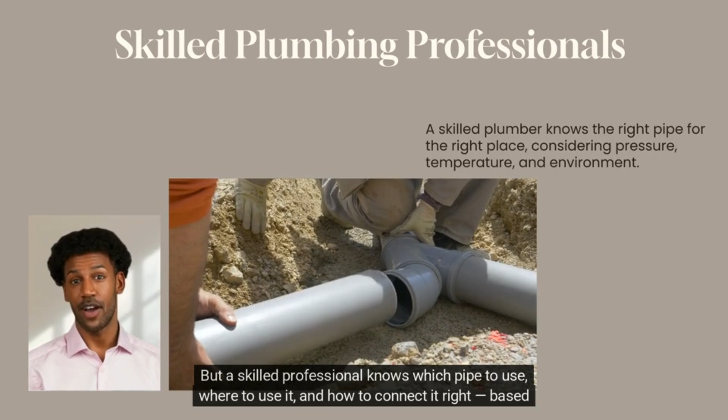Welcome to Module 4, Types of Pipes and Fittings. Now listen carefully, because this module is where your journey moves from general knowledge to real mastery of plumbing materials. You see, any plumber can install a pipe, but a skilled professional knows which pipe to use, where to use it, and how to connect it right based on pressure, temperature, environment, and function.

Water supply, drainage, gas lines, they all demand different materials, fittings, and joining methods. This module will train your eye to recognize pipe types, your mind to select wisely, and your hands to measure, cut, and join with precision. Because in this trade, the pipe you choose and the way you fit it could mean the difference between a solid system and a leaking nightmare.

Let's begin. By the end of this module, you'll no longer guess what pipe to use. You'll know it with confidence. You'll be able to identify the different types of pipes and fittings used in plumbing, PVC, GI, copper, PPR, and understand their specific applications. You'll learn how to measure, cut, and prepare each type of pipe for installation, and most importantly, how to join them using the correct method.

From solvent welding to heat fusion, from threading to soldering, you'll gain the hands-on understanding to make leak-free, professional-grade connections. This isn't about memorizing names. It's about mastering materials and knowing how to make the right choices on any site, under any condition. Because the mark of a true plumber isn't just in the tools they use, it's in the materials they understand and the systems they build to last.

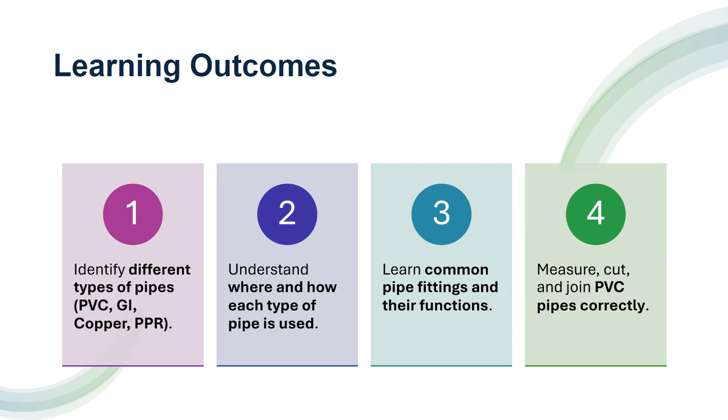Let me ask you a question. Have you ever turned on a tap and water flowed instantly? Or flushed a toilet and the waste disappeared without a second thought? That quiet system, hidden behind walls and under floors, is powered by pipes. In plumbing, pipes are lifelines. They move clean water to people and wastewater away from them. They protect health, preserve hygiene, and provide comfort, without being seen, without being celebrated.

Water supply. Every time a child drinks from a kitchen sink or a nurse washes hands in a hospital, it's a water supply pipe doing its job. Strong, reliable, leak-proof. Drainage and sewage. On the other side, drainage pipes carry used water from sinks, toilets, and showers out of buildings safely, so disease doesn't spread and environments stay clean.

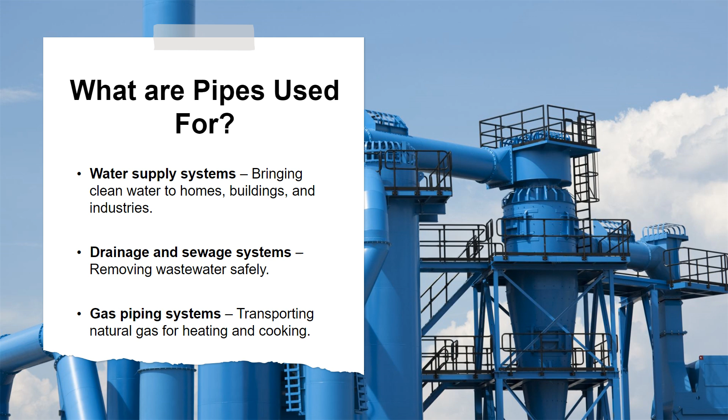Gas piping. And in homes that use gas for cooking or heating, pipes carry something even more sensitive: flammable gas. That means one wrong material, one faulty connection, and the risk is life-threatening. So you see, this isn't just about connecting tubes. This is about building trust into walls, safety into kitchens, dignity into homes. This is why you must know what pipes are used for, and choose the right type every time. Every pipe tells a story about where it should be, how it should perform, and what it can handle.

Let me introduce you to the 4 most common pipe materials in the trade, the ones you'll touch, cut, and install again and again. PVC, polyvinyl chloride, lightweight, affordable, easy to cut. PVC is your go-to pipe for cold water supply and drainage systems. But be warned, it can't handle heat. Use it for hot water, and it warps. It breaks, and your client calls you back, angry.

GI, galvanized iron. This pipe is old-school strong, coated to resist rust. It was once the king of plumbing. But today, it's being replaced. It's heavy, tough to thread, and rusts inside over time. Still, on the right job, under the right conditions, GI can be a warrior.

Copper. Elegant and durable, resistant to corrosion. Copper pipes are the gold standard, especially for hot water and clean drinking lines. But know this, copper is expensive, and it demands soldering skills. You don't install copper casually. You install it with care.

PPR. Polypropylene random copolymer. This modern green pipe is built for pressure. It's ideal for hot and cold water supply, especially in residential and commercial buildings. PPR requires heat fusion. You melt it to join it. When done right, the joint is as strong as the pipe itself.

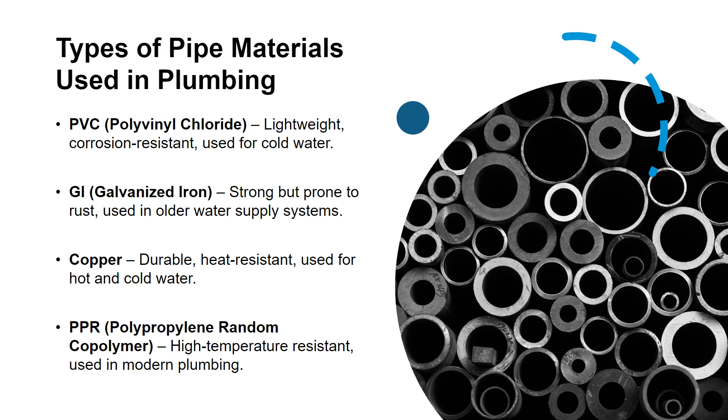Each of these pipes is a tool, and every tool must match its task. Use them wrong, and you fail the system. Use them right, and the system serves for years. So start learning the feel, the weight, the strength, the purpose. Because a true plumber knows, it's not just what you install, it's what you choose to install.

Let me introduce you to one of the most common pipes you'll ever handle, PVC, short for polyvinyl chloride. If you walk into a hardware store or a job site, this is the pipe you'll see in stacks, lightweight, white, and ready to serve. Why it's popular. PVC is a favorite because it's light to carry, easy to cut, resistant to rust and corrosion. That makes it perfect for cold water supply systems, drainage systems, and even underground lines.

Limitations. But don't let its simplicity fool you. PVC has limits. It can't handle heat. Install it in a hot water system and it will warp, bend, or burst. And because it's plastic, it's not as strong as GI or copper under physical stress.

So avoid using it where the pipe might be stepped on, hit, or exposed to harsh environments. How to work with it. PVC is joined using solvent cement, a chemical bonding method. It's quick, but you need to be precise. A rushed or uneven joint could leak later.

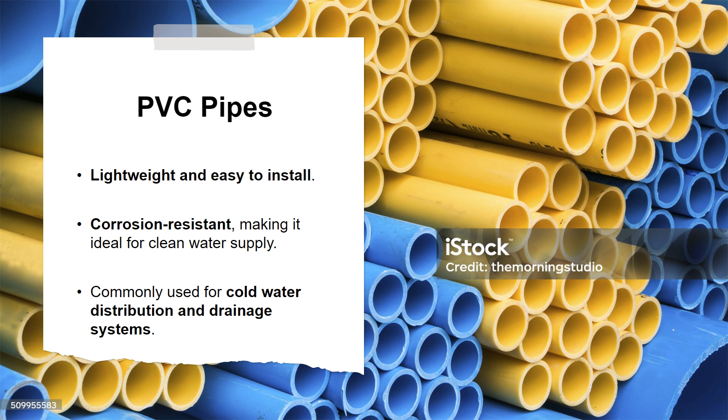Field tip from experience. I've seen young plumbers press fittings too hard, thinking tighter is better. But PVC fittings need smooth application, not force. It's about finesse, not strength. Mastering PVC is step 1 in your pipe journey. Respect it, handle it well, and it will serve, leak-free, silent, and strong, for years.

Let me introduce you to one of the most common pipes you'll ever handle, PVC, short for polyvinyl chloride. If you walk into a hardware store or a job site, this is the pipe you'll see in stacks, lightweight, white, and ready to serve. Why it's popular. PVC is a favorite because it's light to carry, easy to cut, resistant to rust and corrosion. That makes it perfect for cold water supply systems, drainage systems, and even underground lines.

Limitations. But don't let its simplicity fool you. PVC has limits. It can't handle heat. Install it in a hot water system and it will warp, bend, or burst. And because it's plastic, it's not as strong as GI or copper under physical stress. So avoid using it where the pipe might be stepped on, hit, or exposed to harsh environments.

How to work with it. PVC is joined using solvent cement, a chemical bonding method. It's quick, but you need to be precise. A rushed or uneven joint could leak later.

Field tip from experience. I've seen young plumbers press fittings too hard, thinking tighter is better. But PVC fittings need smooth application, not force. It's about finesse, not strength. Mastering PVC is step 1 in your pipe journey. Respect it, handle it well, and it will serve, leak-free, silent, and strong, for years.

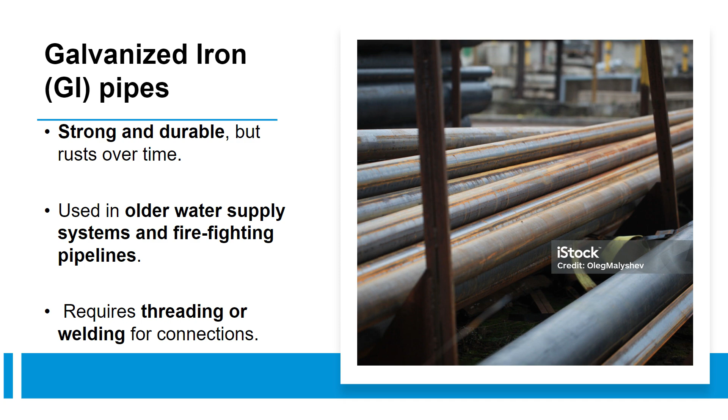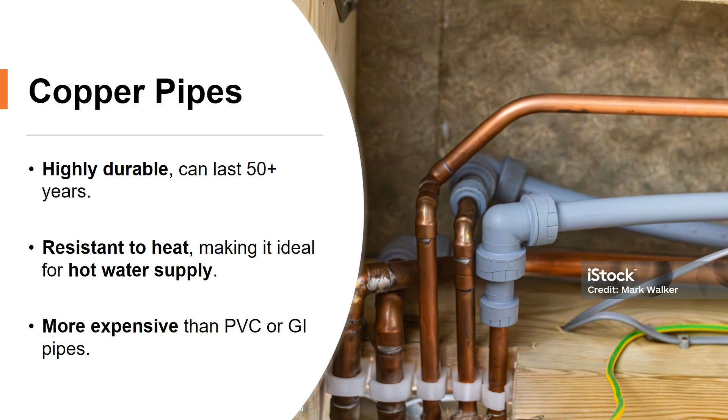Pro tip from the field. Always clean both the pipe and fitting with emery cloth before soldering. A dirty joint will fail, no matter how much heat you use. Copper isn't just about piping. It's about craftsmanship. If you can work with copper, you've earned respect. So learn it. Master the flame. Build with confidence. Because copper doesn't forgive shortcuts, but it rewards precision.

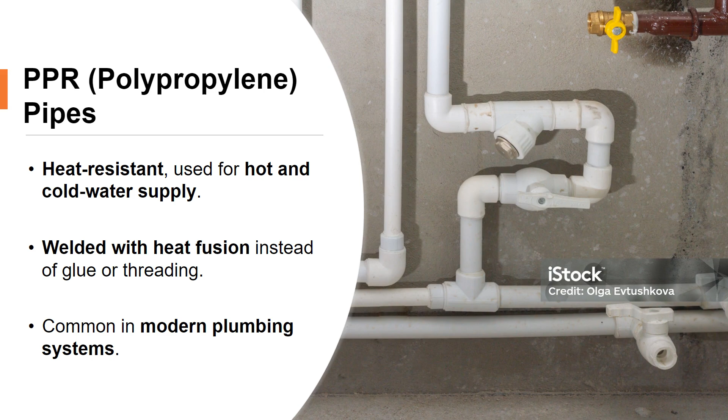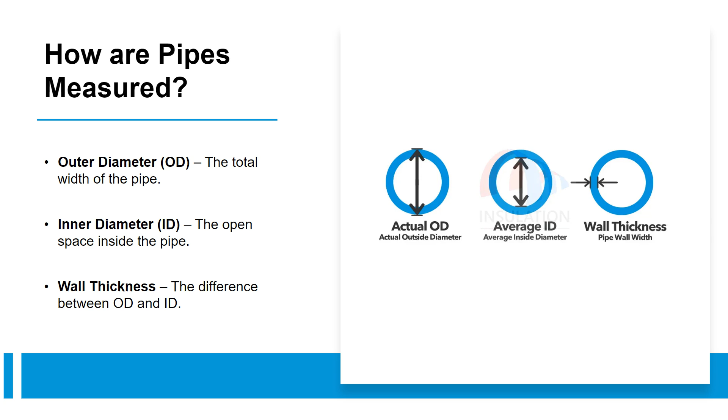Two pipes may look the same, but their internal diameter or wall thickness could be completely different. And trust me, mismatched measurements create bad joins, leaks, and frustrated clients. So don't measure with your eyes. Use your tools. Take your time. Because the plumber who knows how a pipe is measured is the plumber whose work fits. The first time. Every time.

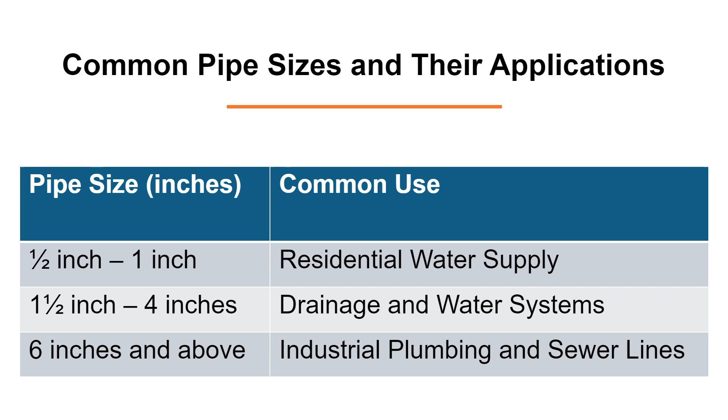The right size pipe does more than just fit. It ensures function, flow, and longevity. So don't guess. Learn the sizes, understand the purpose, and make the right choice. Every single time.

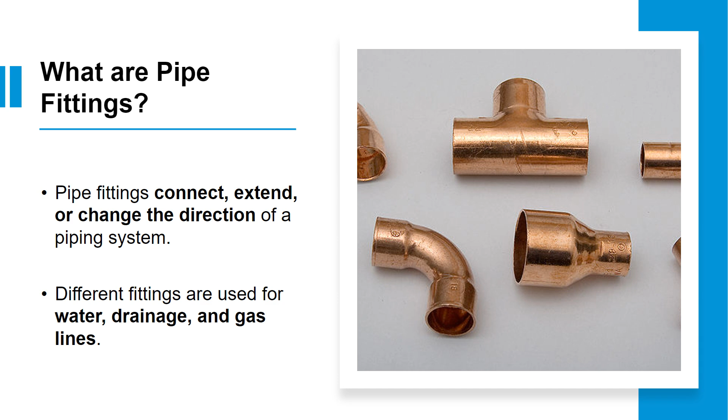Let's make one thing clear. A pipe can carry water, but it's the fittings that shape the journey. Pipe fittings are the connectors, the changers, the adjusters. Without them, a plumbing system is just a pile of tubes. So what are fittings really?

They're components that allow you to change direction, like when a pipe needs to turn a corner. Connect or extend pipes when one isn't long enough. Branch off to feed multiple fixtures from one line. Reduce or increase size when you're connecting pipes of different diameters. Seal or close a line for testing or shutdown.

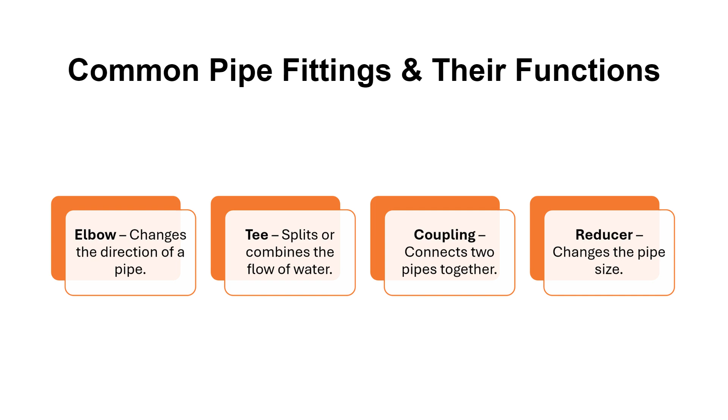Every fitting serves a purpose, and every job needs the right one. Use the wrong fitting, and the pressure's off. The flow suffers, the system leaks. So start learning to recognize fittings like familiar tools. Because once you understand fittings, you don't just build plumbing, you design systems that last.

In plumbing, a few millimeters can make the difference between a perfect fit and a frustrating do-over. Measuring pipes correctly is not just the first step. It's the step that defines every joint, every connection, and every flow. Step 1. Use the right tool. Don't guess. Don't eyeball it. Use a tape measure for length or a vernier caliper for diameter. These tools tell the truth. Your eyes don't.

Step 2. Measure from the right end. Always start from a clean, square-cut end. If the end is rough or jagged, your measurement will be off. And make sure you're on the correct scale, metric or imperial. Mixing them up is a costly mistake. Step 3. Mark clearly and accurately. Use a marker or pencil to make your line. Wrap it around the pipe for a full guide, especially for larger pipes where straightness matters.

Step 4. Account for fitting allowance. This is where many beginners mess up. When inserting a pipe into a fitting, a portion of the pipe goes inside. Always subtract the fitting depth from your cut length, or your pipe will be too long and won't seat properly.

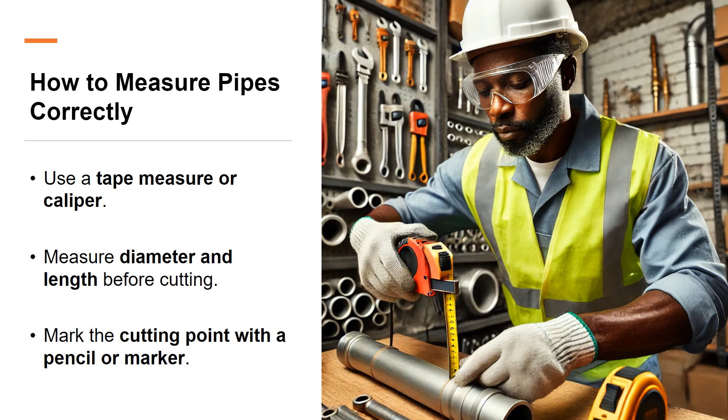Here is advice from a mentor from the field. Measure twice, cut once. Always check again before you cut, because once you cut a pipe too short, there's no undoing it. Accuracy is your reputation, and precision is the habit of every master plumber. Start measuring like a pro, every time.

All right, now it's time to learn how to make a strong, leak-free joint using the PVC solvent cement method. This method is fast, effective, and easy to master, but only when you follow the steps with care and precision. Step 1. Clean and dry the pipe ends. Start by making sure both the pipe and fitting are clean and dry. Use a clean cloth to wipe away dirt, dust, and moisture, because even a little grit can weaken the bond.

Step 2. Mark the insertion depth. Insert the pipe into the fitting without cement, and mark the point where it fully enters. That's your guide for applying cement, and for ensuring you push it in all the way later. Step 3. Apply primer, if required. Some projects require primer before cement. It softens the plastic and improves bonding. If your standard says so, don't skip it.

Step 4. Apply solvent cement evenly. Now apply solvent cement to both the outside of the pipe and the inside of the fitting. Use a clean applicator and work quickly. The cement starts setting fast. Step 5. Insert and twist. Immediately push the pipe into the fitting firmly with a slight twist, about a quarter turn. This spreads the cement evenly and creates a tight seal.

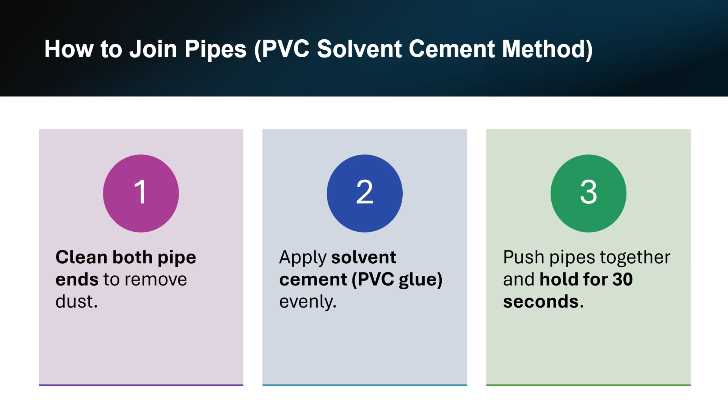Step 6. Hold and wipe. Hold the joint in place for 30 seconds. Don't move it. Then wipe off the excess cement with a cloth. Movement at this stage is the #1 cause of weak joints. Step 7. Allow time to cure. Let the joint cure, usually 15 to 30 minutes before handling, and up to 24 hours before pressure testing. This isn't glue, it's chemistry. Done right, this bond is permanent and watertight. So don't rush. Respect the process, and build a joint that lasts as long as the pipe itself.

You've now seen how to join PVC pipes, but remember, not all pipes are joined the same way. Different materials demand different techniques. Let me show you the standard joining methods, based on the pipe material. PVC pipes, solvent cement method. Quick, reliable, and widely used. Apply cement to both the pipe and fitting. Push, twist slightly, and hold. It chemically fuses into a single watertight joint.

GI pipes, threading or welding. Galvanized iron pipes are usually joined using threads. Male to female connections with sealant or tape. For permanent setups, welding is used, but that requires skill and equipment. Copper pipes, soldering, capillary method. With copper, it's all about heat. You clean both ends, apply flux, heat the joint, and feed in solder. It flows into the gap and solidifies to create a durable, leak-free seal.

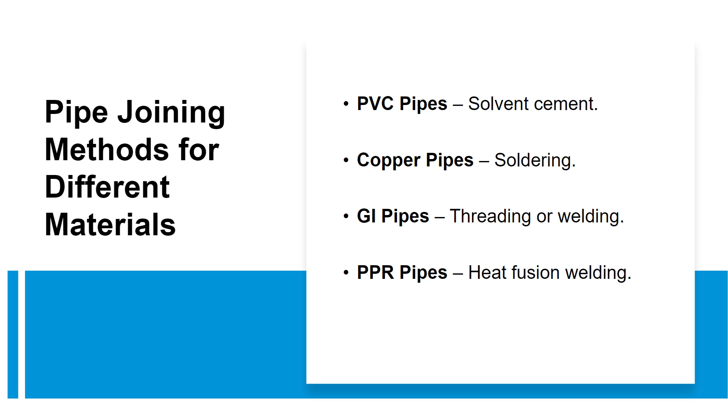PPR pipes, heat fusion method. PPR requires a special tool that heats both pipe and fitting. You push them together while hot, and when it cools, they're molecularly bonded. No leaks, no weak points. But timing is everything. So here's what you must always remember. Know your material. Know the right method. Never mix and match techniques, because the joint is where systems succeed or fail. And a plumber who understands joining methods, that's someone ready for the real world.

Measure, cut, join. You'll be working with PVC pipes and fittings to perform 3 essential tasks. 1. Measure and mark pipe lengths accurately using your tape or caliper. 2. Cut each piece using a suitable cutting tool, hacksaw or PVC cutter. 3. Join the pipes using the solvent cement method. Follow every step, clean, apply, push, twist, and hold. What your instructor will look for: proper use of tools and safety gear. Clean, square cuts with no burrs. Accurate cement application. Strong, aligned joints with no visible gaps.

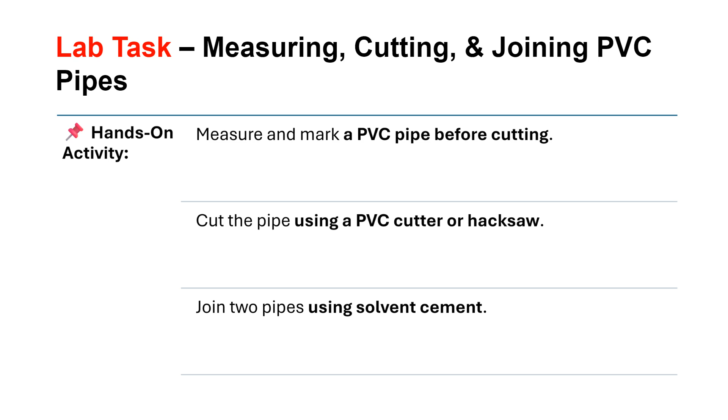Don't rush. Take pride in every move. This isn't just a task, it's a rehearsal for the real world. And what you practice here will show up on every job site you step onto. Now go ahead. Measure carefully. Cut confidently. Join with precision. You've just completed Module 4. And believe me, this one lays the foundation for everything else to come. Let's take a moment to lock in the big lessons.

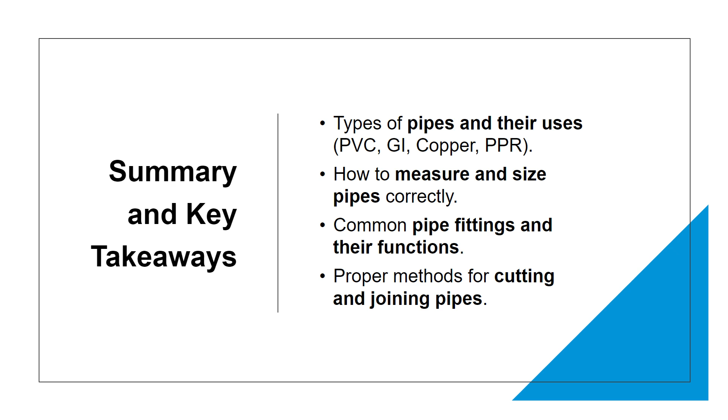You now know the major types of pipes: PVC, GI, copper, PPR, each with its own strength, purpose, and joining method. And now you know when to use what, not just by name, but by performance. You've learned how to measure and cut with precision, not just for fit, but for flow, safety, and long-term durability. Measurements matter. You've been introduced to fittings and joints, from elbows and T's to reducers and caps, and the joining methods that hold it all together. Because plumbing isn't just about connections, it's about integrity.

Well done, apprentice. You've just completed Module 4, one of the most essential modules in your plumbing journey. But remember, your learning doesn't end with slides. Go back to your training manual, study every diagram, read every step again. Because mastery is built through repetition and reflection. Head to the workshop, pick up those pipes, cut them, join them. You've seen how it's done, now it's your turn to do it. Under supervision, yes, but with your own hands.

And don't forget your module quiz. It's not just a test, it's a checkpoint. It tells you what you've truly understood, and what needs more work. Every pipe you measure, every joint you make, every question you answer, it all counts. Push forward, keep practicing, and I'll see you in Module 5, ready for more.